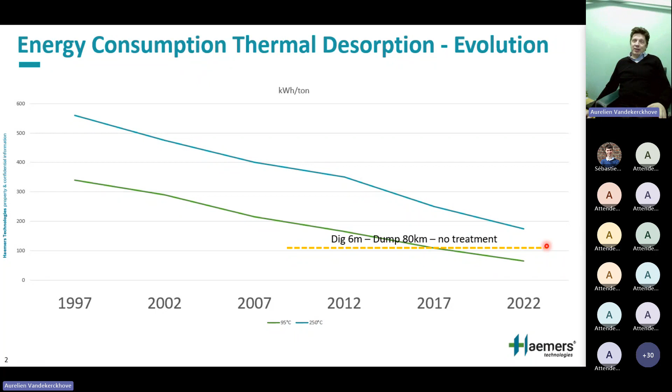So the same result at the end, but not the same level of progress. Today I think we can be very proud - and I'll finish with a clear example - that we have reached the level where we are equivalent, sometimes even lower in consumption, than dig and dump. Dig and dump meaning excavating, transportation, bringing back clean material, no treatment. So it's displacing the problem versus actually treating it, and still consuming less energy. This is the key driver of this webinar and presentation, but it needs to be hammered home because there's a lot of historical misconception, with people not actually looking at the numbers. We're engineers, we look at numbers.

So I'll briefly introduce the company, and we'll talk about energy as part of sustainability. It's a key part, and then we'll dig deeper into the key drivers - why it's so essential to understand that design can be the reason why we have gone down that much. I'll close with a concrete case.

I just noticed I forgot to cut down my phone, and I want to do that right away so that we're on our own and nobody's going to disturb us.

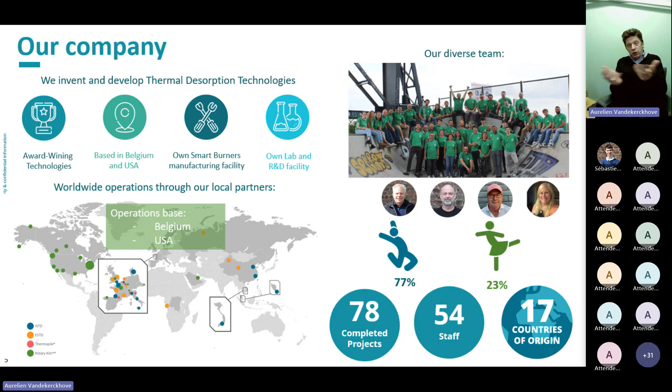I don't know if you know that, but people tend to forget that excavators don't run on lemonade, so they also need fuel. When you come to roughly 110 kilowatt hours per ton, that is how much it takes to excavate 1 ton of dirt at 6 meters deep, transport it 80 kilometers, and bring clean soil back and put it back at 6 meters. That's the amount of energy used, 110 kilowatt hours per ton. It is substantial. People tend to forget about it, but it is substantial and it's key.

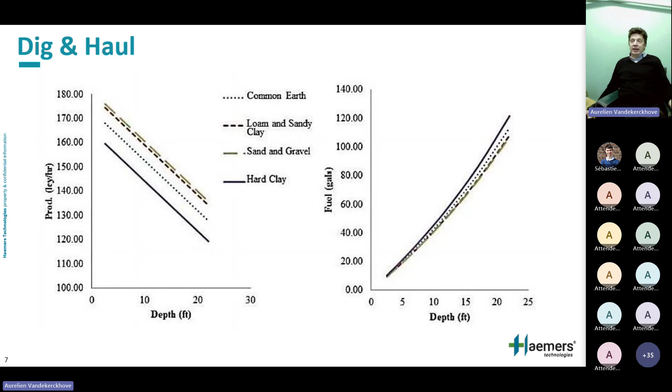Of course, energy prices have gone through the roof last year. Now they're pretty low again, but the lesson we learned is that energy prices are very variable, so they can go any direction. The first answer to that from a sustainability standpoint is to reduce our consumption. In a second step, make sure that the absolute needed energy is as green as possible.

So in other words, rule one: how many kilowatt hours per ton? That should be the minimum. And then make sure that the kilowatt hours you use are as low carbon as possible. But don't make the common mistake of saying, I'm going to use more, but it's going to be green energy. That's a common mistake, and I think it's wrong, because if you use more energy but say it's green so it doesn't matter—no. The energy you could save is actually going to be used by someone else, and that would be gray energy. So that is what we would qualify as typically a bit of greenwashing.

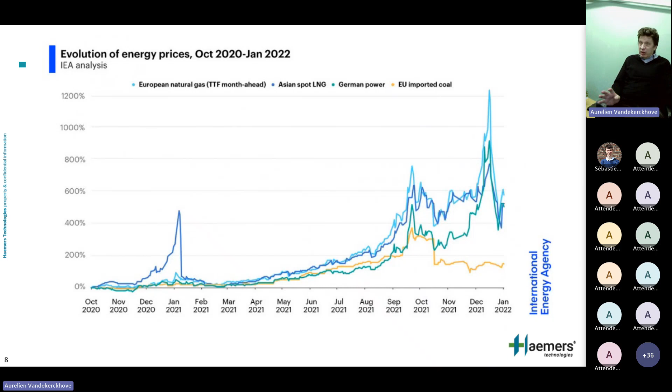So let's continue on our journey towards energy. Already 10 years ago, thermal was considered more sustainable than excavation, albeit with higher energy consumption. More sustainable—why? Because it delivered a more circular approach. By cleaning soil in situ while reaching the same result, you didn't create the same disturbance. You didn't have to excavate, didn't have to cause hindrances and transportation and risks on the roads, and consume clean materials, etc. You didn't have to do that. So that was a big advantage of having it in situ, which provided in situ thermal with much higher sustainability scores than the alternative of dig and dump.

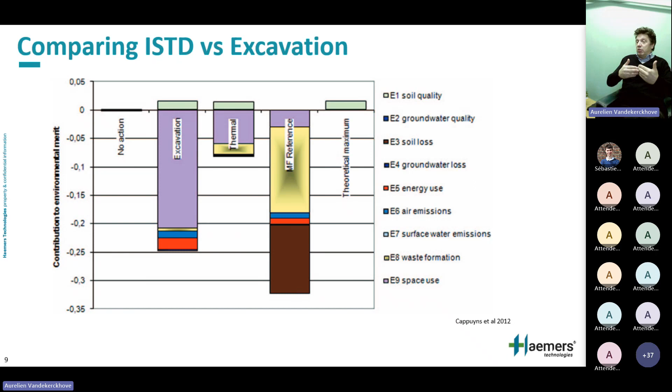Today it's even better because we're even better on the energy standpoint. Right, so that's the message on energy and sustainability, so that we can really excel on that part. Now let's go into consumption itself and how it works—that's the core of my presentation today.

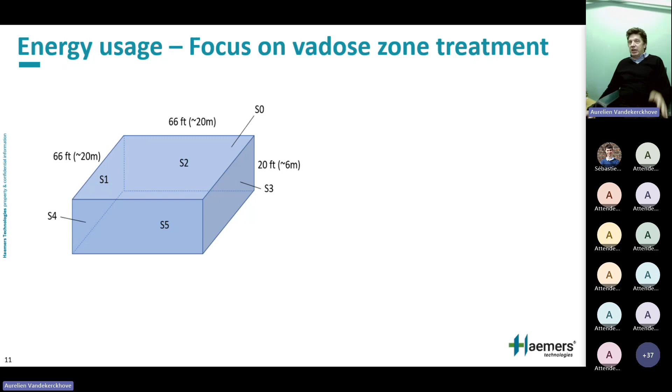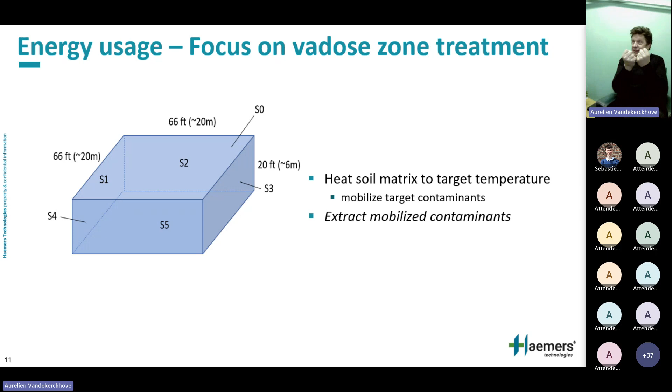Energy usage: we're going to start from theory and focus on a volume of soil. We consider a volume of soil in this case, pretty simple to see, 20 by 20 by 6. So six surfaces—this is the base we're going to look at, and we're going to consider how we can heat that up, how much energy it will take, and what the design is. We're going to consider the vadose zone, and no influx of water, so a relatively simple system. The whole point is to reach a certain temperature so that the pollutants are mobilized by being transformed into vapor phase, and then extracted. That's essentially what we're going to try to reach.

So we see that energy requirements are independent of the heating technique. No matter how you heat it, it's a matter of how many kilowatt hours, or joules, or BTUs—whatever unit you use—but how many kilowatt hours you need to heat a certain volume. If we're in this room and we need to bring it up to, say, 30 degrees from 20, the amount of energy needed wouldn't make a difference whether we heat it with a fire, a radiator, or an electrical heater. It doesn't matter—it's the amount of energy we need.

And that also will depend on the soil characteristics—that's the main factor. So what type of soil we have, how much water there is—we'll see that will be the main one—and what type of contaminant we have, because that's the essence we need to heat. Of course, if we had to heat air, it would take way less energy than if we have to heat solids. And in this case, we'll have to heat both air and solids.

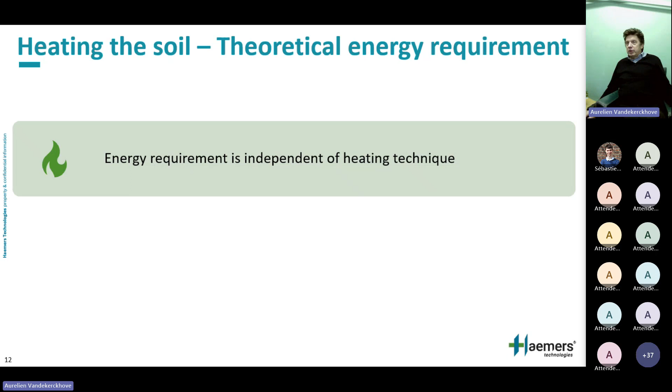Let's go. So let's assume we're in a perfect world. We want to go from 10 degrees to 300 degrees. We have soil, typically at 10 degrees. We want to bring it to 300 because we think once it's at 300, contaminants will be mobilized.

If we do that, in the Vadose zone, we consider no incoming water. We consider very common and usual porosity, 35%, typical density 1.8, and 16% moisture, that's in mass, so it's 16% water based on the total mass. If we do that calculation, we'll end up at...

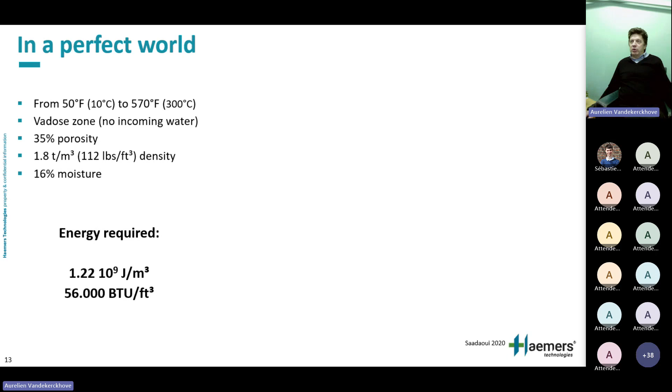1.22 billion joules per cubic meter. So bottom line, it's about 180 kilowatt hours per ton. On a per ton basis with that type of density, for the people following in the imperial system in the US, it's about 56,000 BTU per cubic foot. These are all the data that go into the model that deliver us that number. So that's in a perfect world. Keep in mind about 170, 180 kilowatt hours per ton.

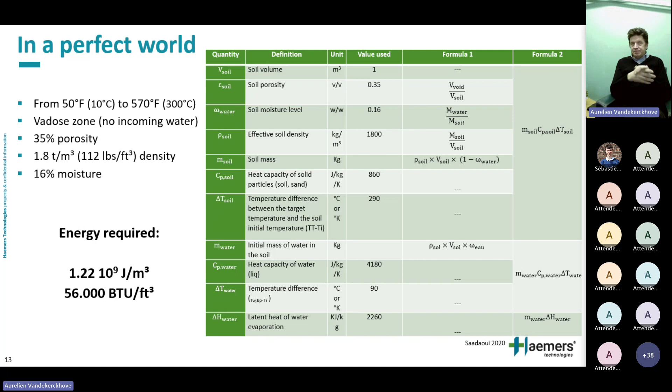That's in theory. So now, do we live in theory? Unfortunately not, but still it's important to look at what the mix is about. The amount of energy we need to use is, as you can see here, for more than 50%, in this case 55%, used to evaporate water. So to go from 99.9 to 100.1 degrees, that's where the bulk of the energy is.

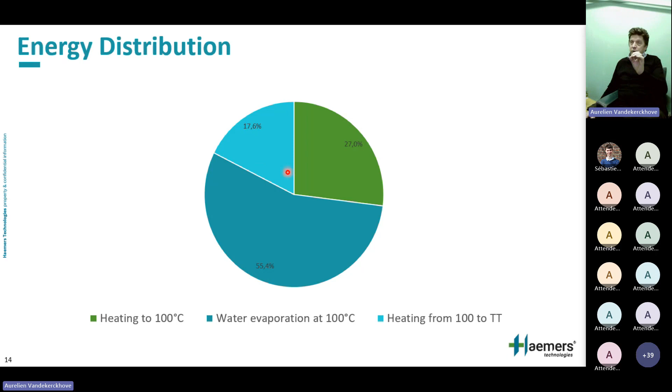Then you'll see it in this graph. We'll see what this means, distance between pipes or energy density, essentially, so it's a design parameter. But you see how long it will take to reach a temperature of 250 degrees, how many days it will take. And all these lines depend on how wet the soil is.

You go from very dry soil, 5%, to relatively wet soil, 20%. You can see, for example, if we take a design with 2.5 meter interdistance, for dry soil we're done in 40 days. For wet soil, it's going to take 105 days. All other things being equal, this shows how important water is.

So this is why water content drives energy, and anything we can do to reduce moisture content in the soil is going to help reduce energy consumption. It's the main driver of energy consumption.

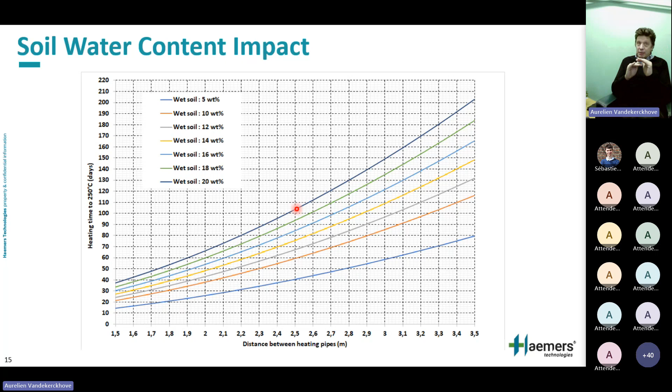Now, as I said, we started the model with a perfect world. In a real world, there are losses and inefficiencies, meaning the heat doesn't stay. Where are the losses and inefficiencies? The first is energy production. We produce energy usually from primary energy, either solar, fossil fuels, secondary or green fuels, biofuels, or geothermal. It comes from a primary source.

And in order to get energy from that primary source to your soil, there's going to be a loss in production. Next to that, there is the transfer efficiency to the soil. Once it's at the site, you still have to transfer it into the soil, and there's going to be a loss there too. Then there are losses at the boundaries: we heat up a volume, and that heat will get out of the volume, so everything that goes out is a loss. These are the three main factors that drive our efficiency.

So energy production will mainly be driven by conversions. The more conversions in energy we have, the less efficient it is. Conversion means you have thermal energy, heat, then you convert it into mechanical energy, then you convert it into electrical energy.

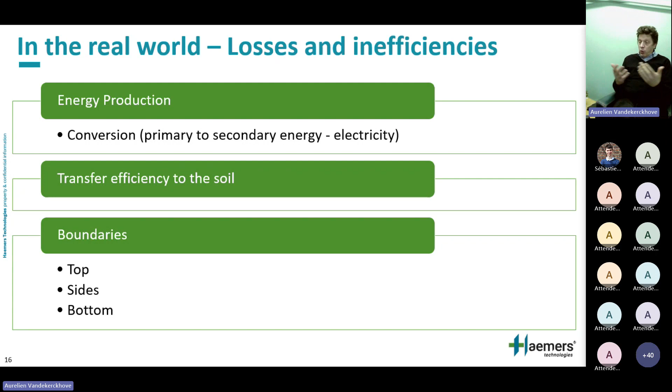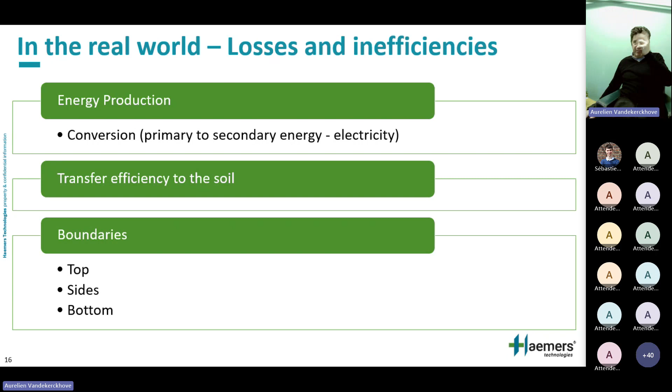Every time you convert energy, you're inefficient and you have losses. That's what drives the total footprint of consumption you have. We're going to get into the transfer efficiency to the soil, and then boundaries. You have a volume, especially in situ. If your volume is hot, where does that heat go? It can go out the top, which will be hot, so you'll have losses. It will go out the sides and the bottom, and of course it will heat up outside of it, and that's a loss as well. So we'll have to figure that out and factor it into our design.

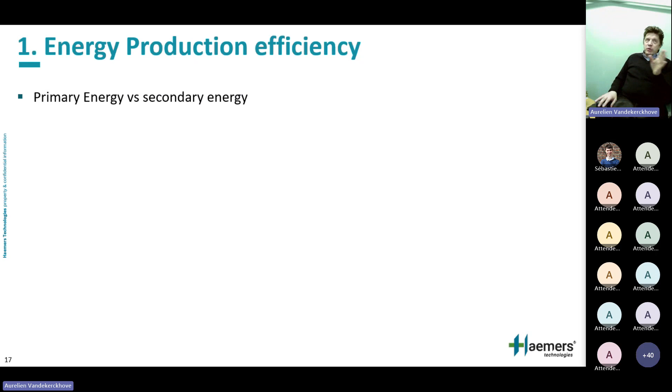So let's first dig into the energy production efficiency. It's a key element, and let's distinguish primary and secondary energy. I've heard a lot of discussions about, yes, but is electricity better than gas? It's not better, it has nothing to do with that. Electricity is not a primary energy. Electricity doesn't come unless you're Zeus and you're the god who masters lightning. Other than that, electricity does not come naturally. It's the result of a transformation itself.

You have to go into the primary energy that makes electricity. So by and large, if you want 1 kilowatt hour of electricity delivered, it will require about 3 kilowatt hours of natural gas, diesel, or coal, because you're in the range of 30, mid to high 30s in efficiency, where that primary energy of natural gas is transformed into electrical energy. Same thing with nuclear, and it's logical: you transform your primary energy, in this case uranium, into heat, which is transferred into mechanical energy, which is then transferred into electrical energy. All these transformations are not perfect and generate losses.

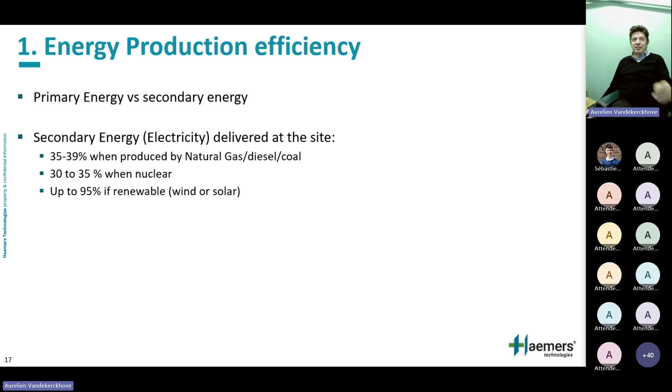If it's renewable, we can assume, to keep it simple, that what comes out of your renewable solar panel or wind turbine is the base we start from. Of course, you can argue there are still losses, but that's where we start. So we're at much higher efficiency at that point. When you look at a site and say I'm going to use electricity, it's important to see where at that site your electricity comes from, and to look at the mix of that energy at that particular grid connection. It's pretty important to calculate your total energy footprint based on where your energy is coming from.

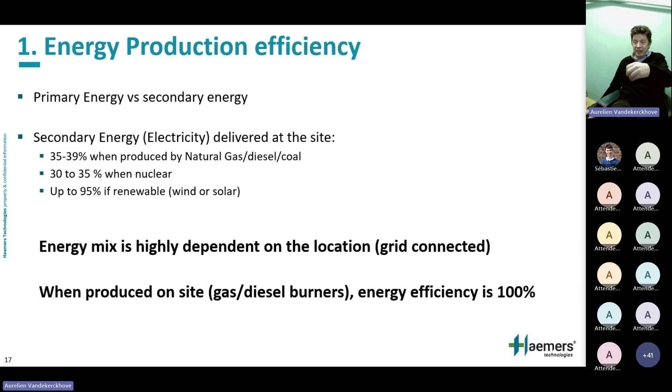Now, if you go on site and use gas or diesel burners, biodiesel burners, biogas burners, your energy efficiency is 100% because you haven't transformed it yet. So it's still there—there's no question of transformation, because the energy source you use is still the same one. There's maybe a little bit lost in transportation, but we don't factor that in here.

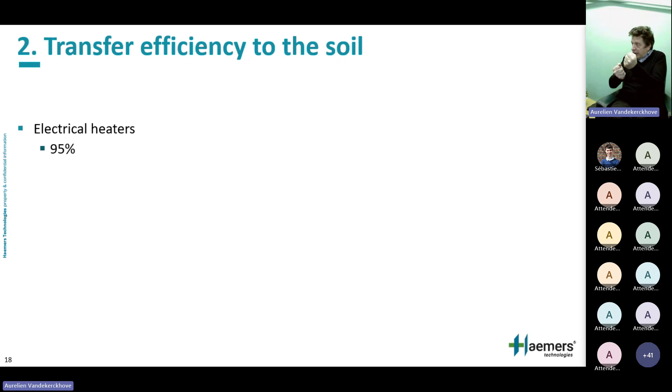Now, the second part is you have your energy on site. How do you transfer that energy on site to the soil? If you use electrical heaters, you have a pretty high efficiency—it's the Joule effect, so you're close to 95% of that electrical energy transformed into heat and transferred to the soil. Pretty high level of energy transfer.

If you go to direct fire heat production, typically with biofuels, natural gas, or diesel, you're much lower than that. With the conventional, older ones we used a long time ago, we were about 35%—almost as bad as electricity. Today, with all the versions and improvements, we're almost at 85%. That means the amount of primary energy contained in, say, 1 cubic meter of biogas is almost completely transferred into the soil. Not completely, because there's still some losses and inefficiency, but most of it is achieved. So that gives you an idea.

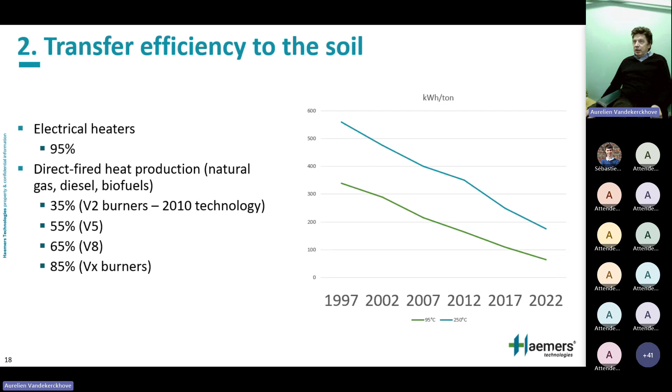This is what explains how this curve is so steep and got us, in 25 years, to where we are today—almost below the level of dig and dump.

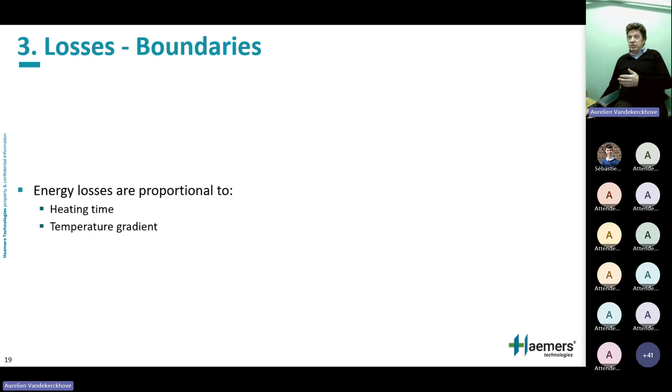Third, last but not least, the losses at the boundaries. These losses depend on heating time and temperature gradient. Same thing as when we want to heat this room: if we put a lot of heaters in and want to reach a certain temperature, once we've reached it, there will still be losses through the wall, and through the window if it's open. That energy lost through the wall, roof, or window is a factor of time on one hand, and a factor of the difference in temperature on the other. If it's the same temperature as outside, there's no loss. The higher the temperature inside, and the bigger the difference between in and out, the bigger the loss will be.

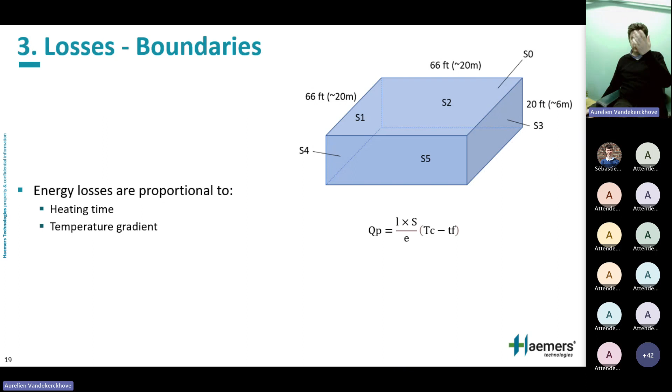Because as we'll see, if you reduce your energy density—put your heating elements farther away from each other—at some point your heating time will climb. And if your energy loss is higher than the energy you need, you will never reach it. You will reach an asymptote. It's just like if you have too many windows open here, you cannot with one heater get to 30 degrees in this room. It will never happen. At some point, it will never happen.

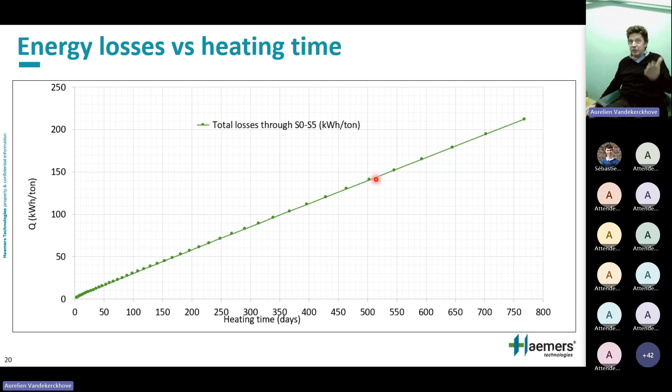So how do we reduce heating time? The shorter the heating time, the less energy we waste, and so the more efficient we are. Keep in mind our goal here in thermal is to reach a certain temperature, and that's it. We're done. We don't have to stay there for another year, we just have to reach a certain temperature. Different than when you heat your house, where you want to reach a certain temperature and then stay there for a longer time. We just have to go there by and large, and then we can get out.

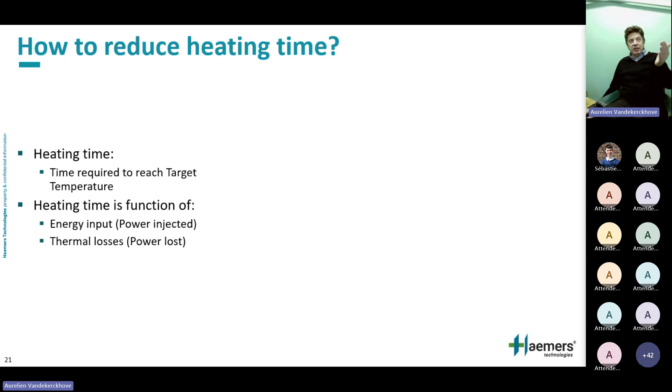So how do we do that? Of course, we can put more energy, like a bigger stove—instead of having a small one, you put a bigger one. That's one option. Or you can put more, which is kind of the same. But you could also insulate better, to reduce your thermal losses. It's the same approach as when you want to reduce your consumption in your house.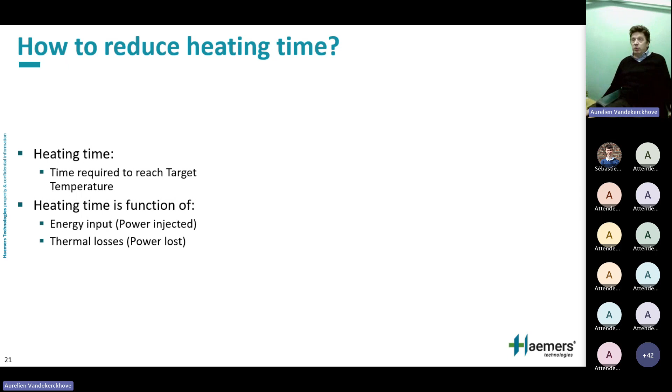But the image I like is the leaking bucket. What we try to do in thermal is we have a bucket, and it's leaking—there are holes, there's nothing we can do. The holes are essentially the losses at the boundaries, the inefficiency. We can try to reduce those holes to a minimum, but there's only that much we can do. We cannot go further. Our goal is just to get that bucket full, and that's it. Once it's full, it's done—it can empty again, but we have to reach the limit of the bucket. That's our goal.

So you can see that in order to do that, you can have different sizes of faucet—a small faucet or a big one. We all understand that if you have a big faucet, you will fill your bucket very quickly, no matter how many holes there are in it. And yes, you will use less water—with a bigger faucet, you will use less water to reach that full bucket. I know it's counterintuitive: bigger faucet, less water.

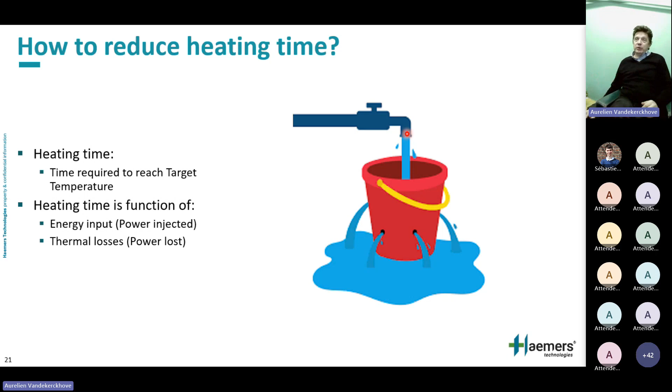In energy terms, the faucet is the power—how many kilowatts do you have. And the amount of water is the energy—how many kilowatt hours do you have. So it's counterintuitive, but if you have more installed power, more watts, you will use less watt hours. I know it's like, what the hell? But that's because we don't have to stay there for a long time, we just have to reach there and then go. So the more power we have, the less kilowatt hours, or the less energy, we would use. That's an important element to keep in mind: energy input and energy lost.

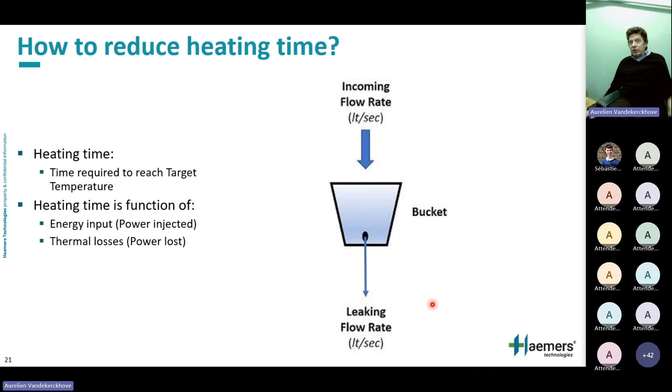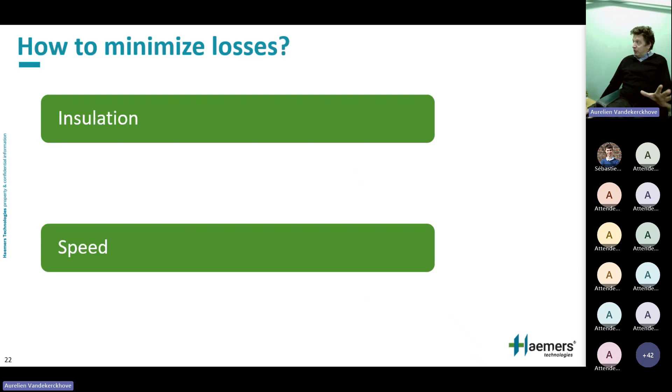And the energy loss, most of it we can't do anything about. So we're going to focus much more on the incoming flow rate, because the leaking rate is a given, typically by design most of the time. So how do we minimize those losses? First, we're going to insulate—insulate more and more, better and better. And then we're going to go fast. These are the two elements. Same as the bucket: try to get those leaks smaller and smaller, and then try to get the biggest faucet possible to fill it quickly.

Insulation, we can do it at the surface. Try to do it as best as possible, because that's out of the 6 surfaces of our box. Remember, there's one that we can access, which is the one on the top. The other ones are pretty hard to access. Now, when we work ex situ, like in piles, then we can control much better, and then we can insulate all surfaces. So we can do it better.

Now, even in containers, we work in completely isolated containers. You'll see that the energy is even much, much lower than that, because our insulation is better. So that's whenever we can insulate, we do insulate.

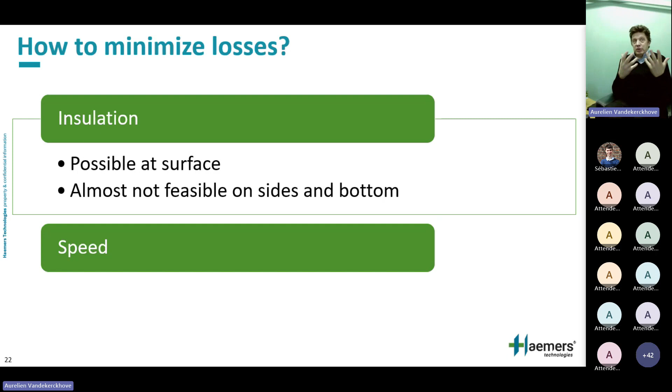And then, of course, speed. Speed is, remember, the size of the faucet. The bigger the faucet, or the bigger the power, the more power injected, the faster we'll go. And actually, the lower will be our energy consumption.

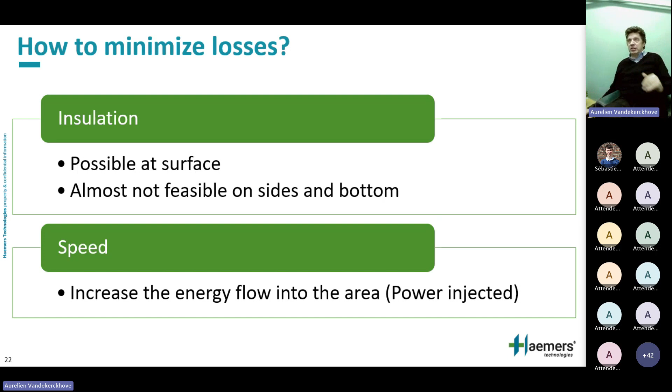So how to increase speed? More power. So as I said, put bigger heaters, or put more heaters. Now, put bigger heaters, there is a physical limit. Soil can only absorb that much heat, typically 0.8 to 1 kilowatts per meter. So it doesn't matter if you put huge heaters in the soil, they will only deliver that much power to the soil. So there is a physical limit there.

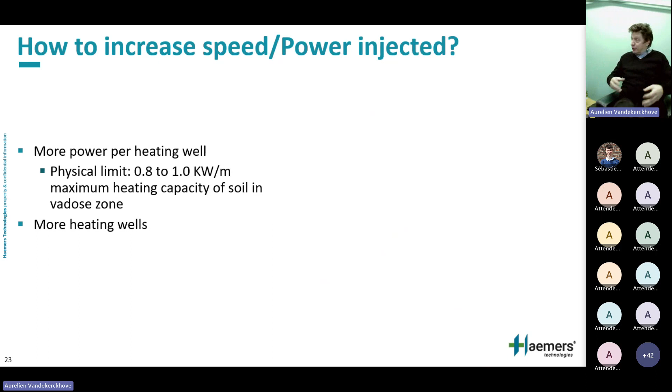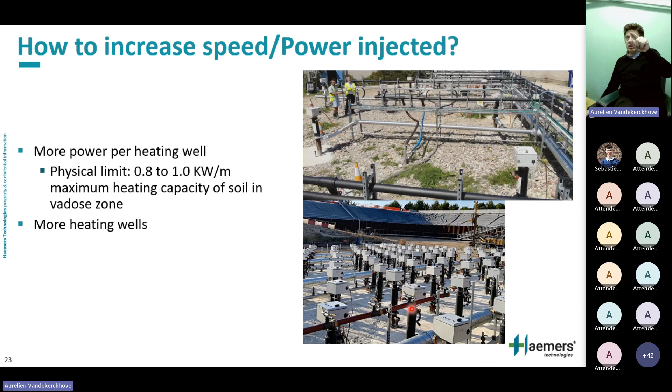So you could see that in some cases you have high interdistance. Here was almost 5 meters, and here you have 1.5 meter interdistance. You see, in some cases, that would be a little bit later in this presentation, there is justifications for going to one or the other of the models.

Now, power input, that's the line I told you about. See, the more power, more interdistance, higher interdistance, so 5 meters in between. These are the two extremes you have. But on the one hand, we need way more power installed than in the other one. That's often the reason why we can't go for the higher density.

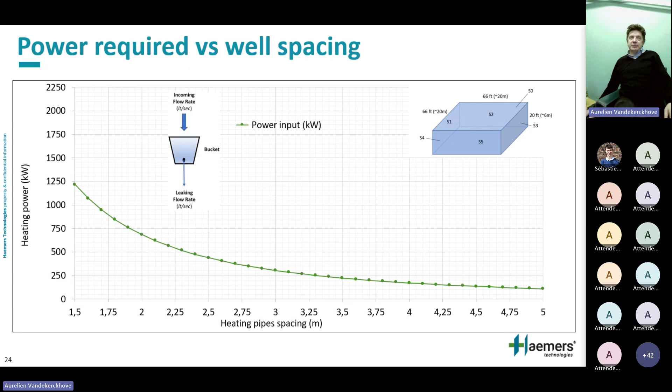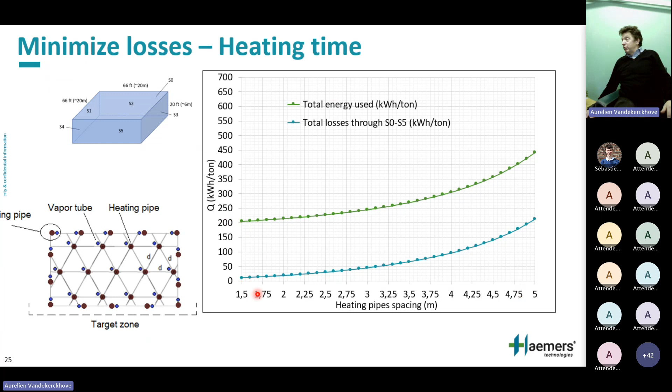So you still see at 450 kilowatt hour per ton when you have low energy density, low power, and you're at 200 with high power. So that's the illustration of what I said: more power, less energy.

But the optimum is not just energy. The optimum is drilling cost. It's good to have a high energy and high density and to have lots of heating wells, but drilling doesn't come free. And in the example I showed you, we have a 5 meter interdistance because the depth was 30 meters. So drilling costs are more. So what you would save on energy, you would spend on drilling 10 times if we had chosen for a 1.5 meter interdistance with a 30 meter depth.

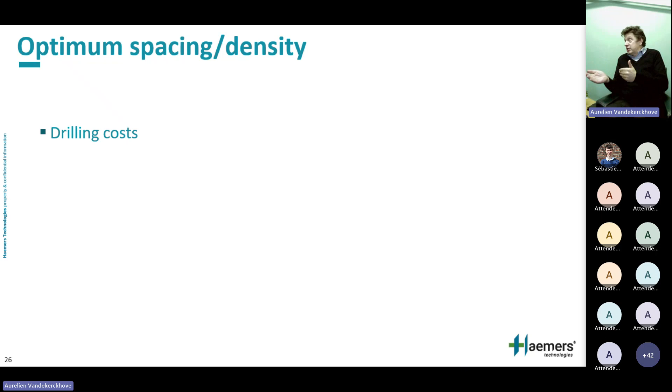So in that case, of course, we had a little bit more energy consumption, but it was more than compensated by drilling cost. But also equipment cost. If you have a lot of heating wells, you have more equipment. So it's also going to increase your cost.

Of course, you have your scaling cost per unit. Panels and connections. The more you have, the more complicated it gets. And the attached labor cost. If you have to install 10 heating wells or 100, of course, all that is proportionate. And in the other direction, you have your heating cost.

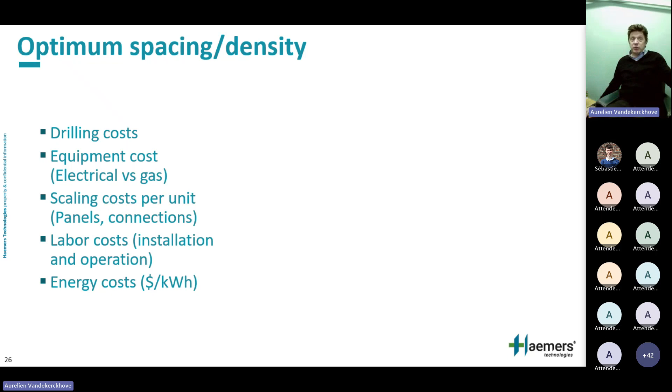Now, if you put all that into the same model, you will see that, and I'll just focus on those two curves. This is interdistance on the x-axis. So high density here, low density here. Very small interdistance here and big interdistance there. The green line is the total duration, right? You would think it should be linear.

It's not. Why? Because in this very high density, your heating time will be very short because you have high density, but your installation time and drilling time will be long. So at some point, if you say, I'm going to do a 1 meter interdistance and I'm going to be done in 2 weeks, but it's taking you 4 months to install all your wells, your total treatment time is 4.5 months, right?

So it will go faster probably if you do a 1.5 meter spacing, because you're going to heat a little longer, but you're going to save so much time on installation and drilling. So you see there's a minimum. But then if you factor in all the other costs, here's the total cost - that's this blue line. You see that with high density, you usually have higher cost. It's very fast, that's the advantage, but it's higher cost.

And with low density, you have higher cost as well. So on the left-hand side, it's more the installation and drilling cost that take the load on the cost. And on the low density side, it's more the energy that starts to kick in. So there's somewhere an optimum to be found, which can vary project by project and requires study, because all these costs will vary from site to site, location to location, geometry to geometry.

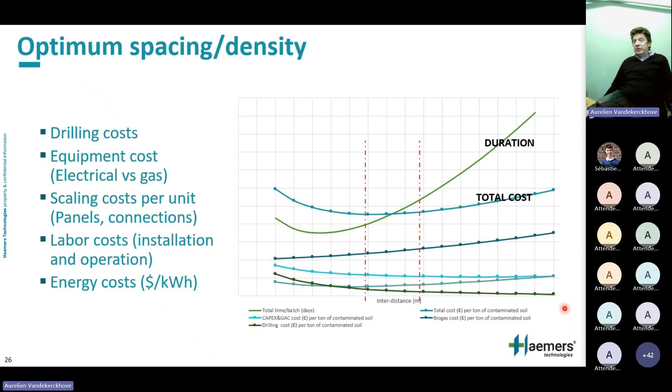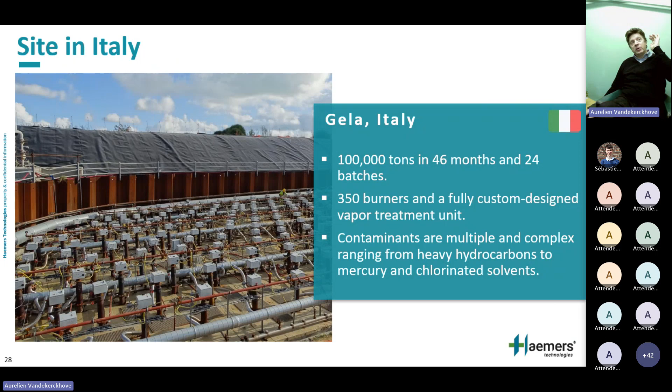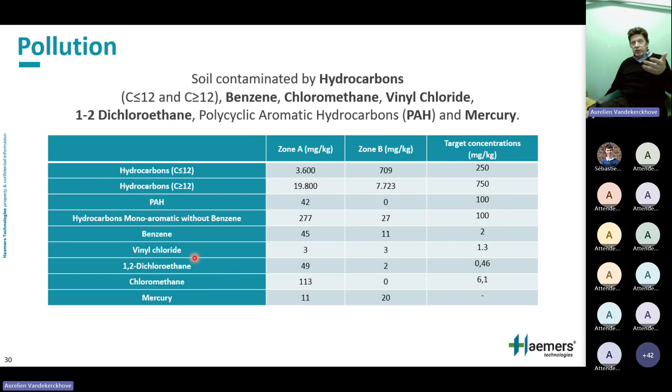So that closes the energy topic. I just want to finish with one single case, the illustration of energy. Here's a site in Italy - this is a refinery, heavy oil site. This is the condition when we got to the site: pretty strict conditions on clean soil and pretty dirty soil. Part was 6 meters deep, the other part was 12.5 meters deep. Hydrocarbons, but also some chlorinated compounds, chloromethane, dichloroethane, and some mercury as well.

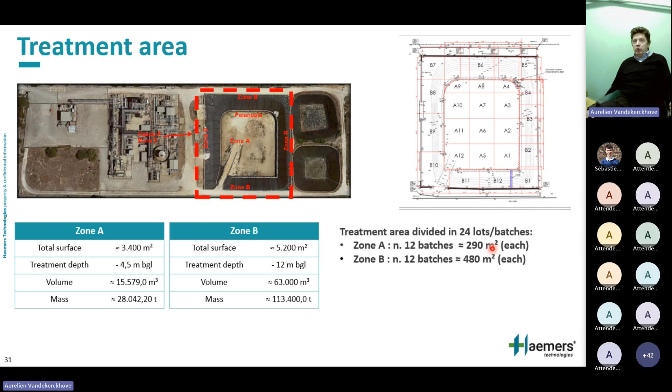Not going to talk about the project and the realization - we did 24 batches over 4 years. But I'm just going to talk about energy. As you can see here, high density. You can see different phases - why different phases? Because that optimizes the equipment cost. You didn't have to purchase all the equipment.

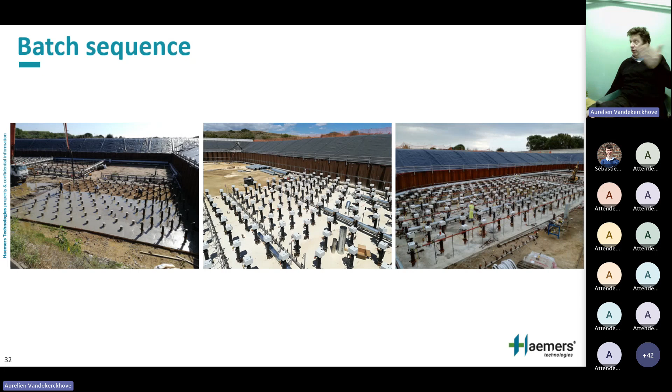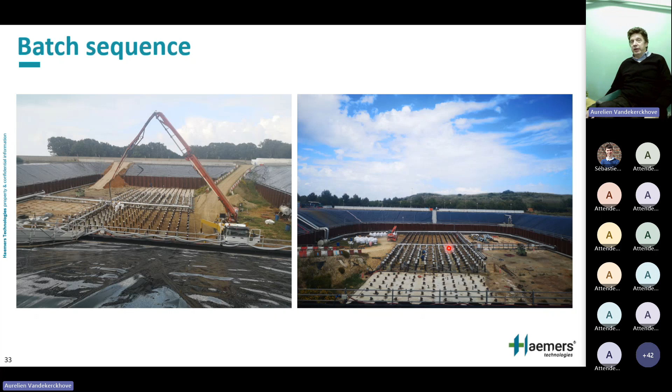So that same equipment was reused from one batch to the other. With a couple of sets of equipment, we could do 24 batches. We didn't need to buy all that equipment, which again is a very important part of sustainability - it's not just throw it away, all of that equipment is reusable and has been reused. Here you have a good view of all these batches: batch 1 finished, batch 2 finished, batch 3 in final approval and finished, batch 5 just dismantled, batch 6 running, batch 7 up and in preparation, batch 8 in drilling, etc. That's how it works.

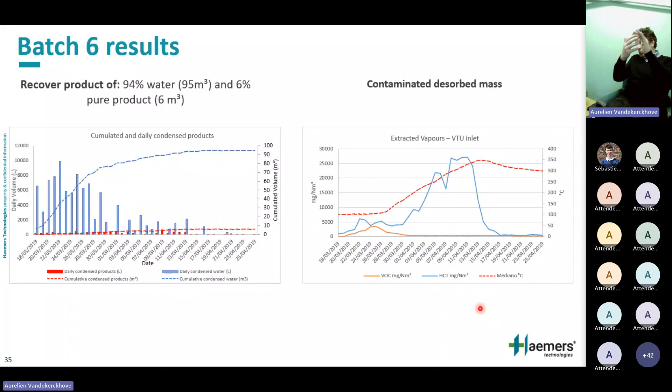Bottom line: temperature reached 250 degrees, 35 days on average. Almost 1 million liters of oil recovered from about 160,000 tons of contaminated soil, because in this case, oil was condensed and sent back to the refinery.

And then the numbers we're talking about, because the topic is energy: total 2.7 million cubic meters of natural gas used for 161,000 tons treated. That's 171 kilowatt hours per ton. Remember, we calculated a theoretical consumption of about 180 - that was to reach 300 degrees. In this case, it's 250, and that was for 16% moisture. Here we got lower moisture, so we had very low inefficiency. I think the theoretical number here was in the range of 150 kilowatt hours, which we were pretty close to with 171.

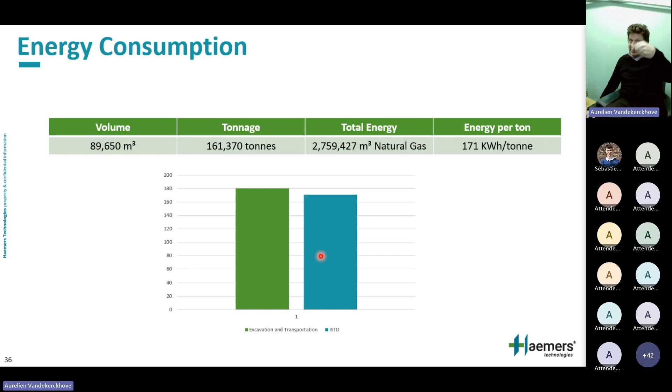But more important, it's 10 kilowatt hours less than dig and dump to 80 kilometers without treatment. So I think this was the proof that we could use less energy than dig and dump, and in particular, clean it and use less energy while still cleaning it, compared to the alternative, which is just not cleaning.

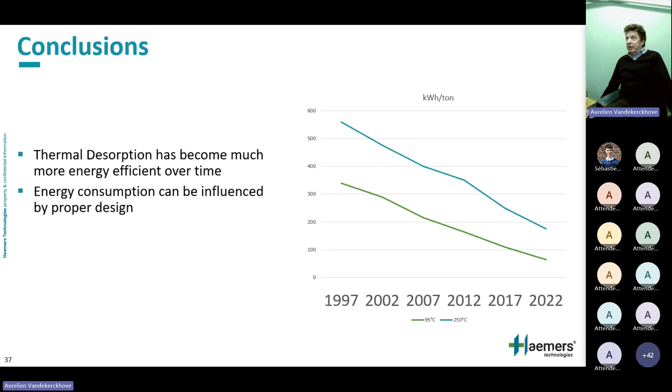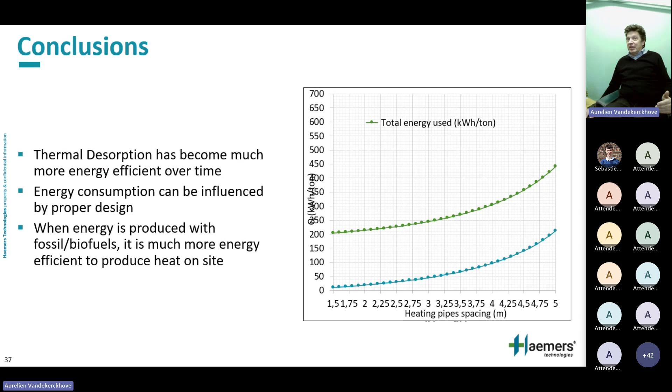Quick conclusion: thermal desorption has become much more energy efficient over time - needless to say, you could see it in this graph. It can be influenced, and it should be influenced, by design. As you can see, the inter-distance will influence your piping design. First, reduce your energy, then use as green energy as possible - it can be liquid or gas. They're all available on site, and it's pretty easy to mobilize wherever you are.

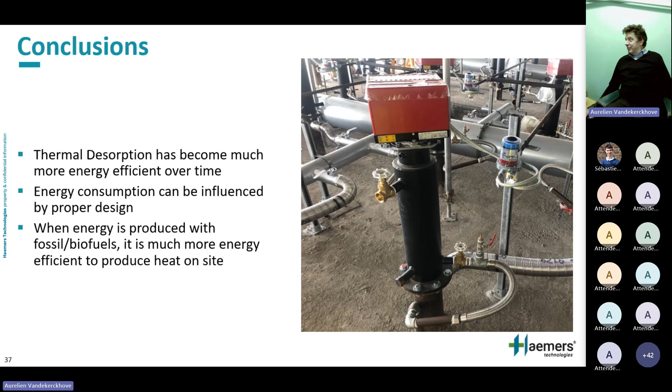So I see one comment. He said: apart from the number of heaters, the main thing is to have a good seal of the soil to be treated so as not to lose heat and increase the heat in less time. Yeah, absolutely. I think it's a very good point.

It was about the losses. Essentially, the volume in situ, even better when it's ex situ, although then you have to excavate. But everything you can seal that you can close is energy that doesn't go up. So that's how you reduce the losses.

Unfortunately, when you do it in situ, there's not a lot you can do other than seal the top. We are working at trying to seal the sides with thermal insulation, kind of keeping that thermal gradient a little bit lower, but there's not that much you can do.

And that's also what explains, if you do the math and look at the numbers, the deeper we treat, the lower the consumption, because the volume is then more advantageous. That's also why in situ is hard to apply when you have say 1 meter thickness or depth, because then your surface is huge and you have a lot of losses. But it's a pretty good point.